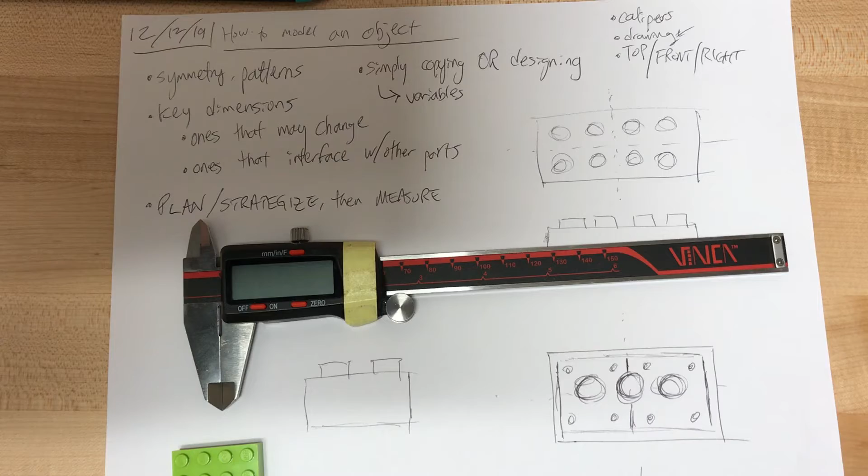In the first episode, we planned it out. In the second episode, we're just going to walk you through calipers. There's a 3-part set of episodes on calipers, so take a look at that. I'm only going to do a brief review. Of course, you should always return your calipers, turn them off, back to where you found them.

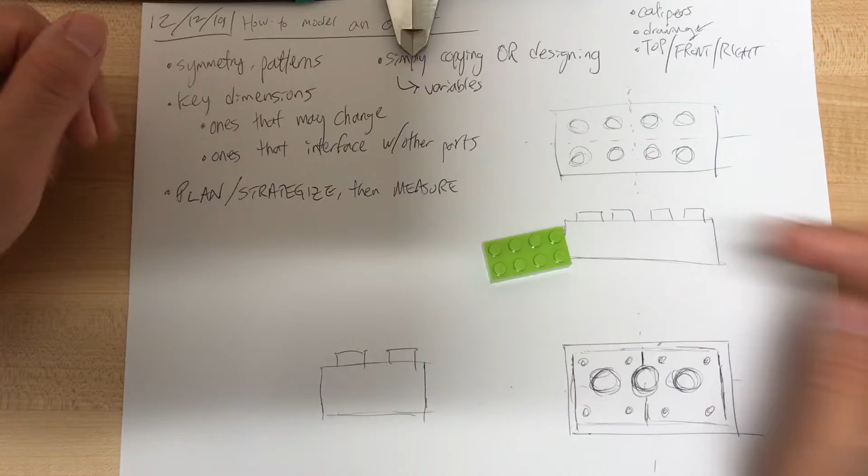All right, so we did these sketches, and this is going to help us with marking our dimensions. The Lego brick is really nice because it's pretty straightforward, but also has some interesting features. Real quick, in terms of a style guide, the circle and slash means diameter. Often, let's say you have a rectangle, we have these parallel lines, a little offset from the edge, and then, I kind of painted myself into a corner.

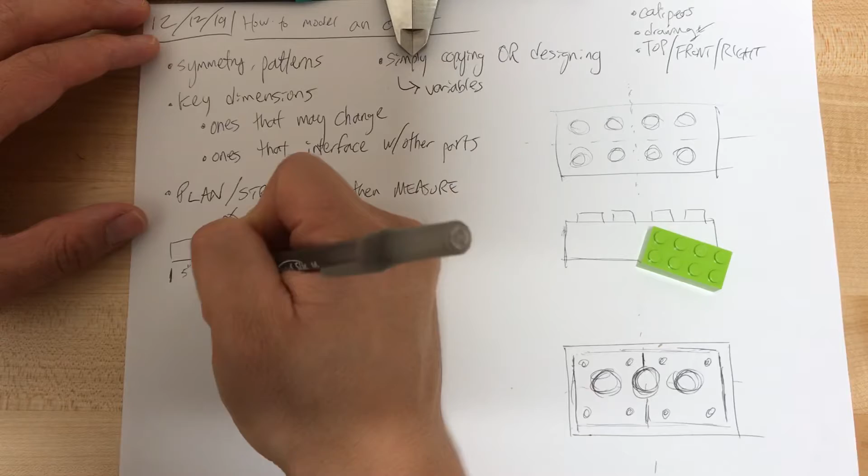Let's say this was 5 inches. So you sort of do an arrow. There's a whole official formal set of rules to follow, and these rules were very important. I guess they're still important, but they were especially important when CAD was stuck to a desktop computer, and when you went out into the shop and made things, you had to rely on drawings.

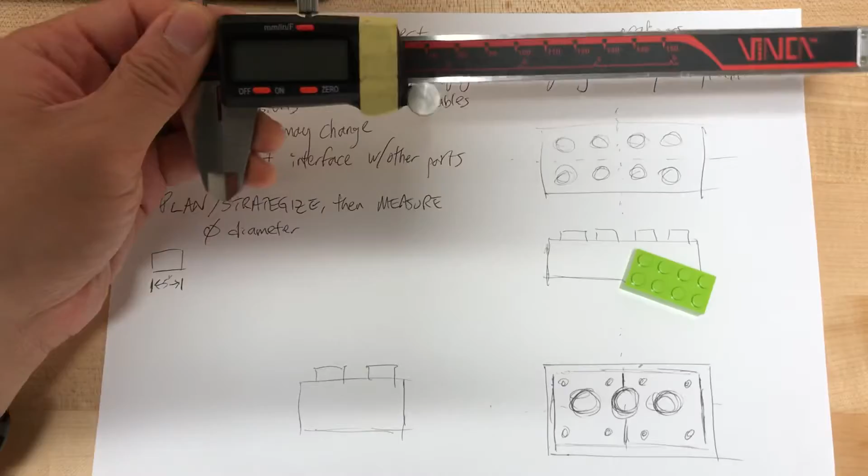Nowadays, you have CAD software that you can pull up on your tablet, and it's just a lot more accessible. All right, so we've got our calipers, we'll turn them on. Now, often in engineering we are working in inches, and I personally like to use inches. But actually, I know for Lego, millimeters is a little better. So you can modify, adjust as you need.

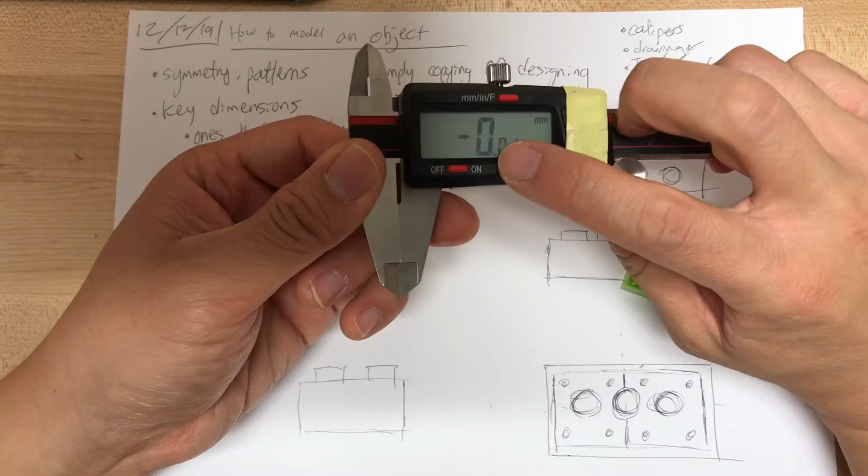All right, as we know with calipers, make sure that your 0 is true 0. Open it up with a thumb wheel. This will tighten it up. Cannot move. Loosen it just a little. Okay, and then it closes. Remember, we have 4 ways to measure on the caliper, so let's open up to a certain value.

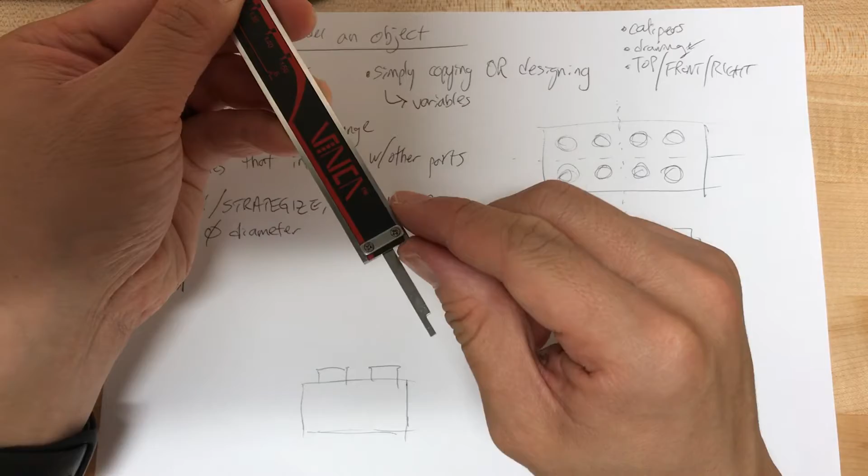29.35 millimeters, I'm going to lock it. Again, this is just review. 4 places, what is it? It's measuring between here and here, here and here. So we have outside, which is here and here, inside, here and here. Depth, okay, I'm not going to adjust the camera, between here and here. And then step, between here and here.

So let's just do a quick one. We're not going to look at numbers, but just show you how you would use it with the Lego brick. So you have something like this, outer. All right, you kind of take a few measurements, take the average of it in your mind. Okay, you can measure that.

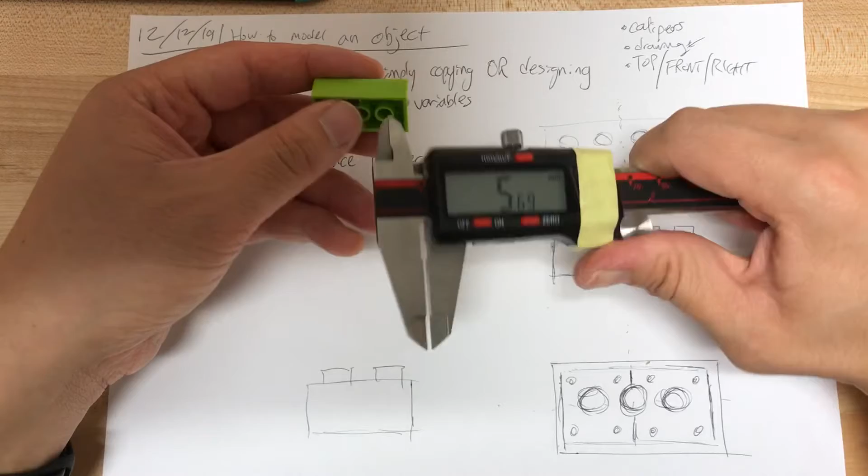So inner would be something like, let's say the circle. Actually, that's probably the best one here. See that? Or you could try to measure between those two.

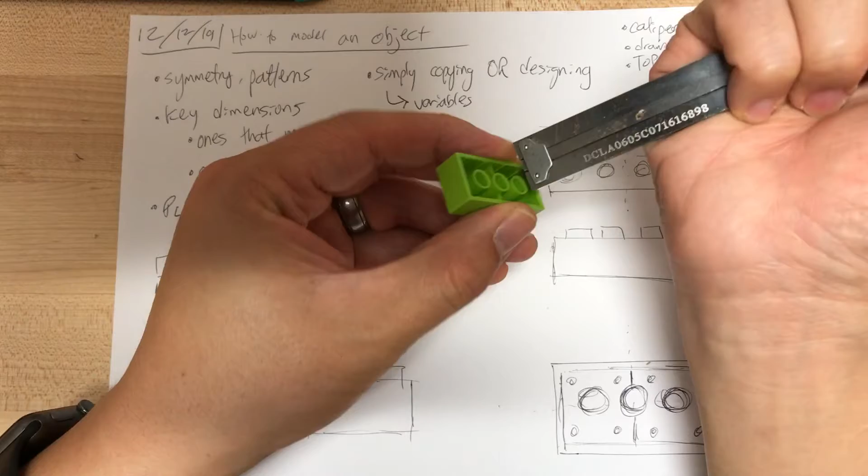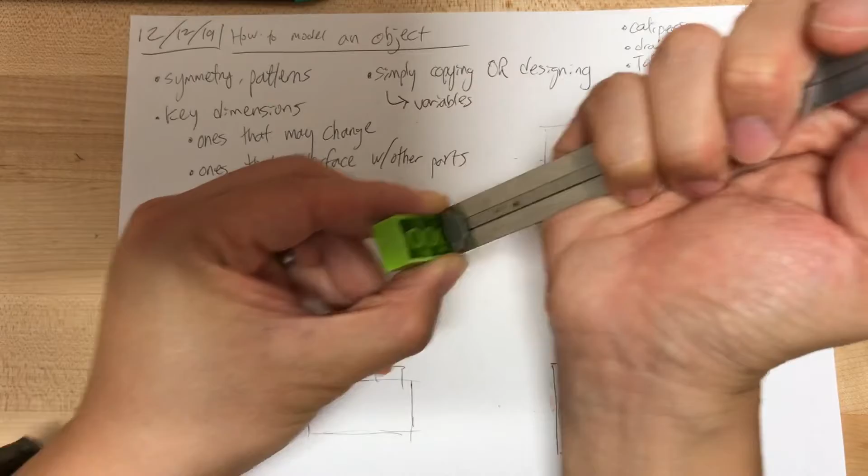Then the depth is really good when it's a sort of hole and you're trying to measure the depth. So you see right here, where my left index finger is, that's one surface. And if we place it on the surface, I can use my thumb here, right thumb, put it down until it stops. And then I can get a reading.

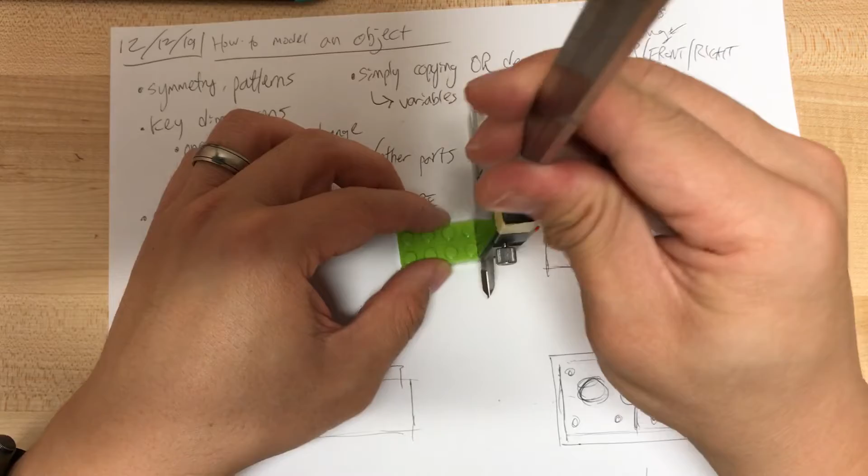And the step, this is the hardest one to see. Think of step just as sort of a height measurement, but it's not a hole, so you have a lot more to measure with. See, so like that. So let me show you again. Boom. Okay, you could also measure it like that. That's fine too.

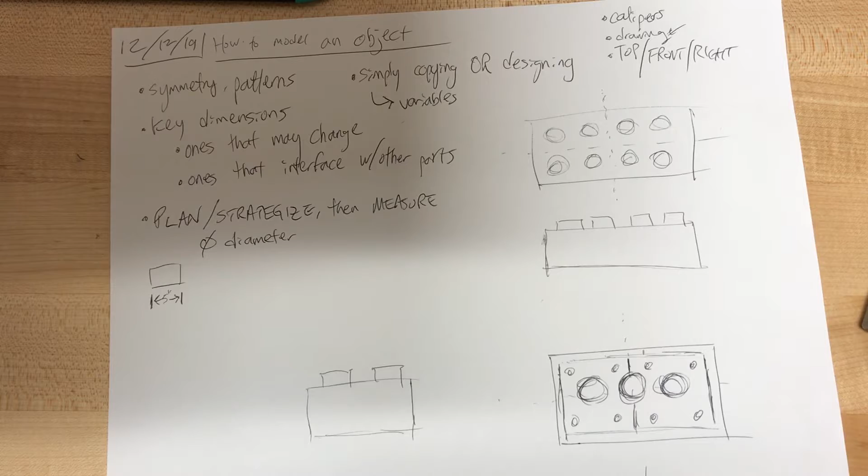All right, I'm not going to go through all of the dimensions. I'm just going to walk through some main ones. And then when we get to a 3rd episode, which in this case we'll do in OnShape, I will have already made the measurements, but it's still good practice for you to do so. Feel free to pause here right now, spend some time on your own. You know our strategy here: make the measurements, and then come back to see how I go about doing it.

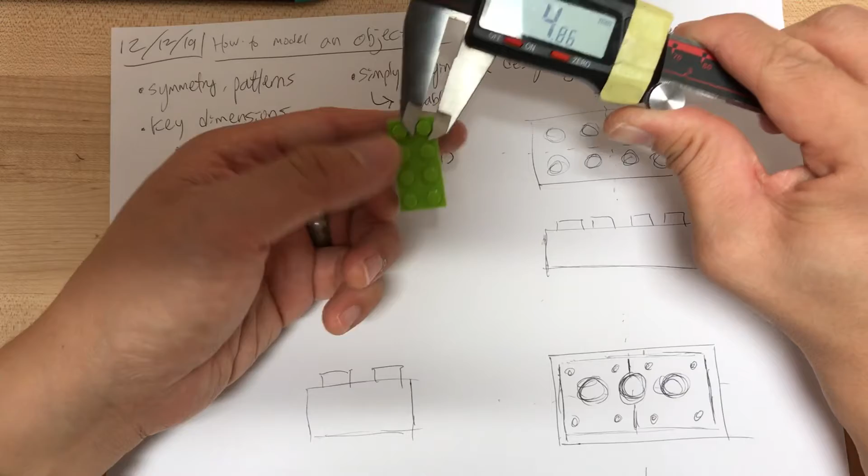All right, so I know these 8 circles are all the same diameter. 4.86, you make a few measurements, 4.87, okay? You just make your best guess. And again, you think back to critical dimensions - just make sure if there is a critical dimension that interfaces with something else, then you get that right. I don't know, I'm calling it 4.88.

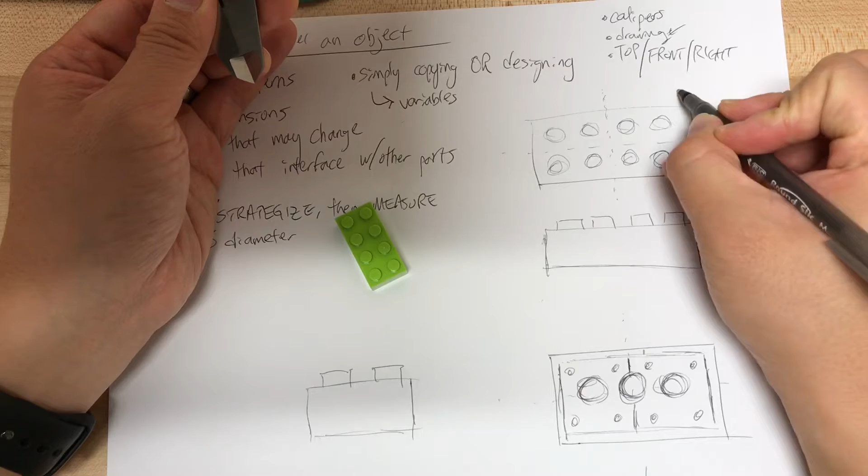Why not? So I'll do a little curved call out, I like to do this. That's probably not proper style. And I did 4.88 millimeters. Again, I would like to emphasize my own personal preference with inches, and often in engineering we do inches. But in this case, because I know Lego, it's better to do millimeters. All right, what else can we look at?

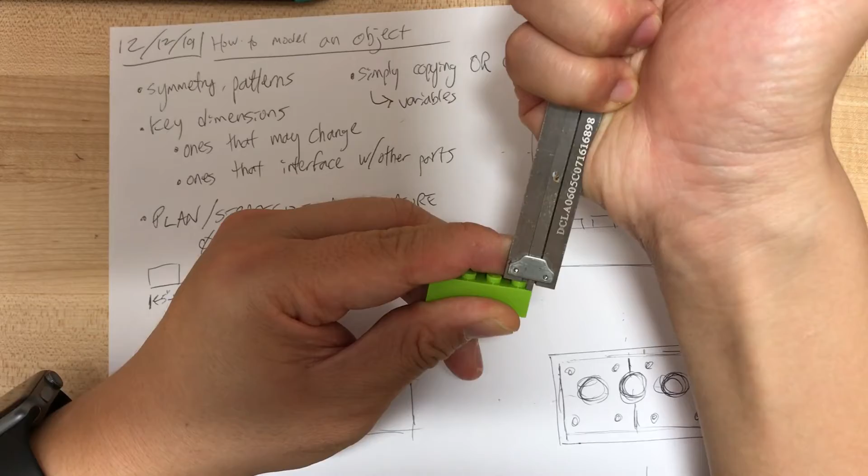Let's look at the height of the stud. So, see if I can put this into picture here. Okay, 2.07. So you see here, here to here. Sometimes if it's narrow, then you can do this. 2.07 millimeters. Now, let's do bigger dimensions.

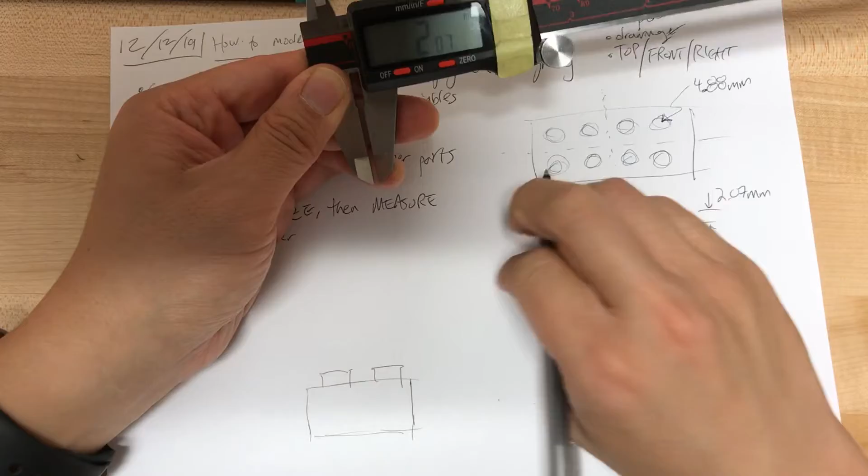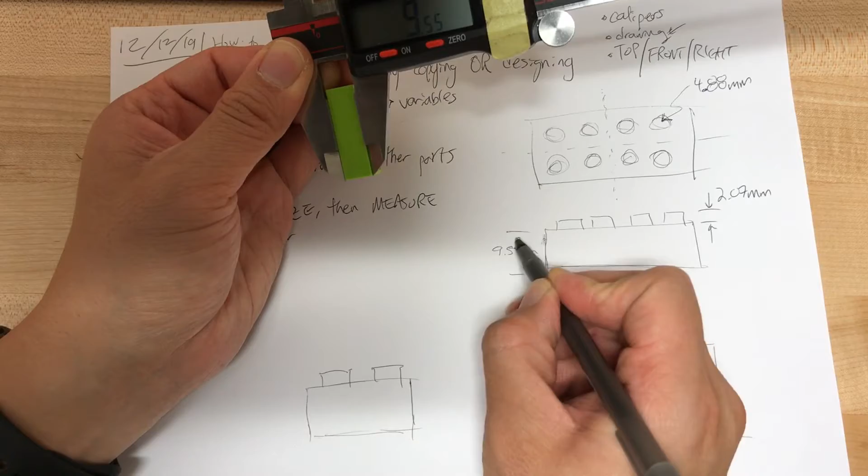Let's do this. I guess we could have done this minus this. That would have been fine. Yeah, lots of different ways to do it. So I'm going to do this, 9.54. So let's draw here, 9.54 millimeters. And of course we have the other dimension of the box on this side.

15.75, let's call it that. Again, these are not all quite to scale, but hopefully the distinguishing features of our object will help us differentiate.

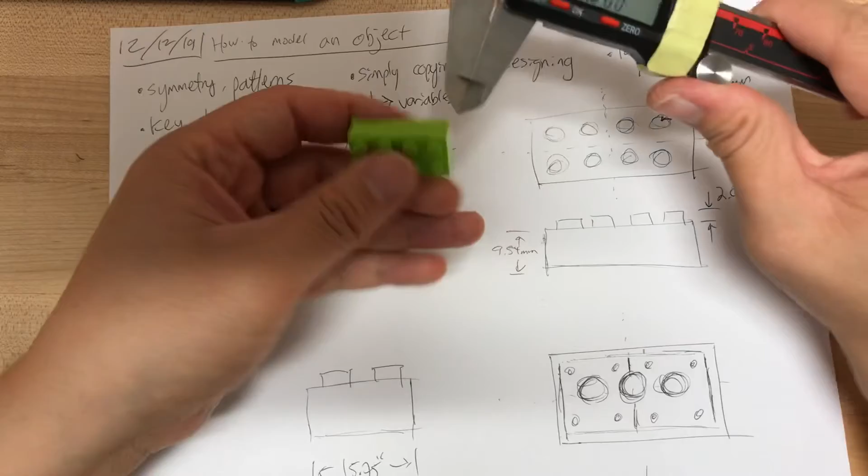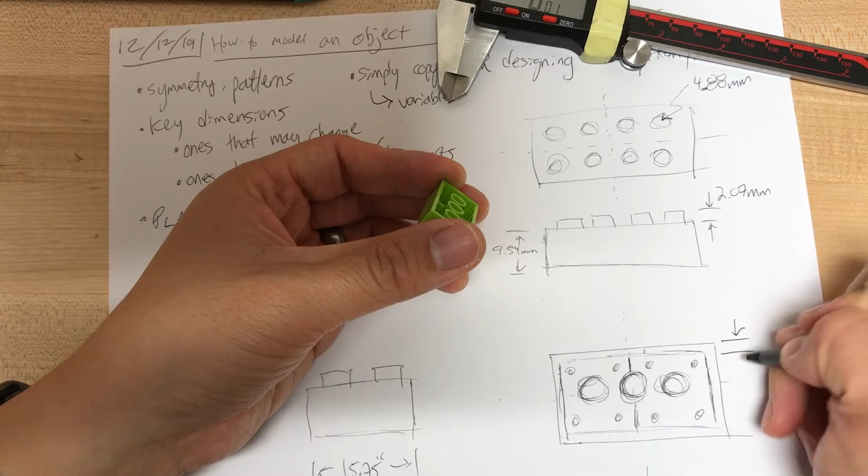Jumping around here, let's go to the thickness. Thickness right here, 1.18. So here to here, draw our arrows. 1.18.

Let's see, inner of this hole, kind of spin it around, call it 5.04. And I'm going to say inner diameter 5.04.

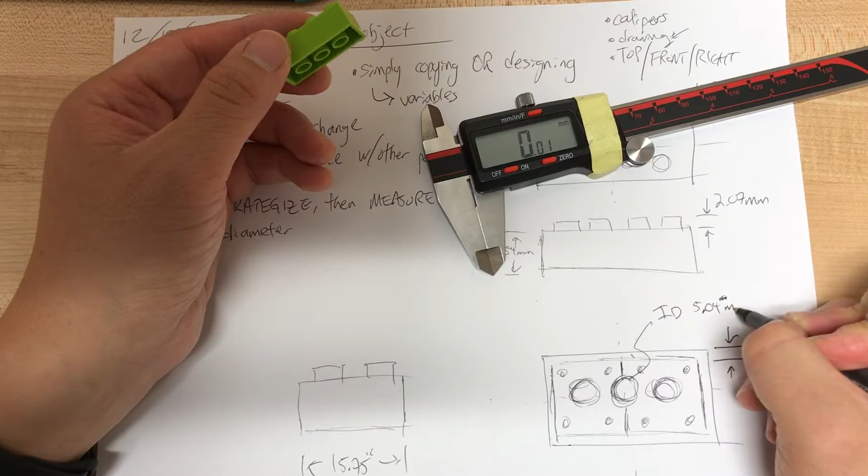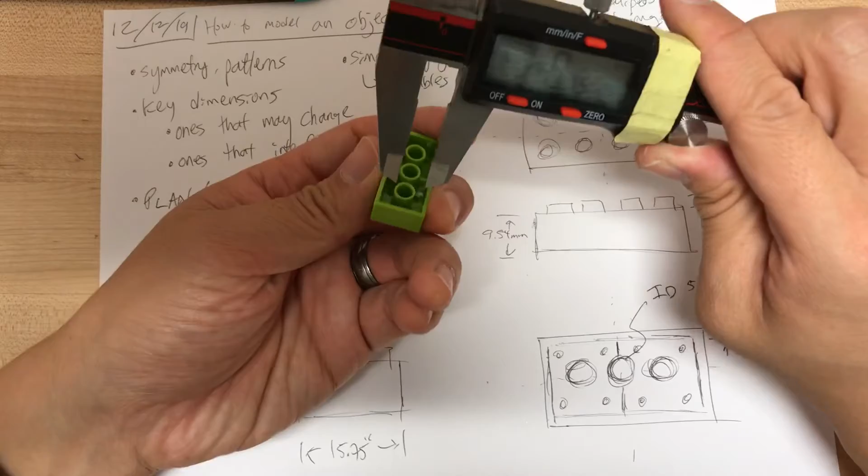Oops, not inches, millimeters. And the outer, a little harder to measure. We're going to assume all three of these are the same. Looking at 6.44 maybe. Yeah, sure, let's call it 6.44. OD, not Garfield's dog, but OD.

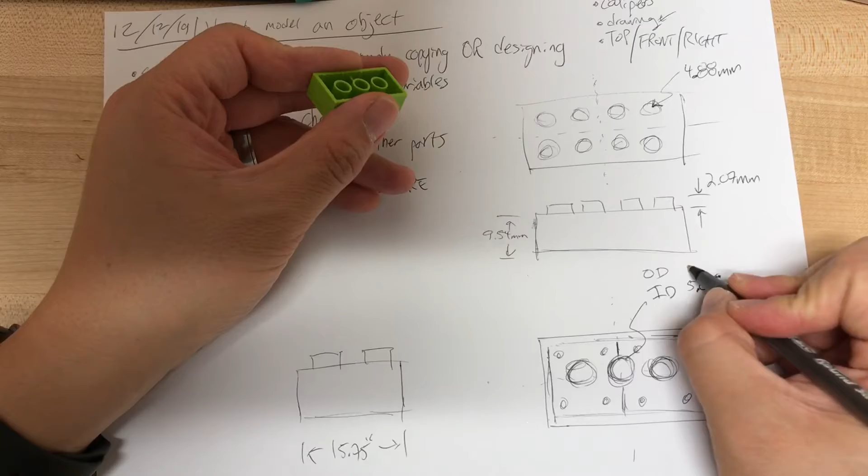6.47. Now you see here as I'm planning it out, if you have to write and then draw, you sort of, I don't know, I feel like that loses your momentum. So that's why draw it out, plan it out, and then hunt for the information.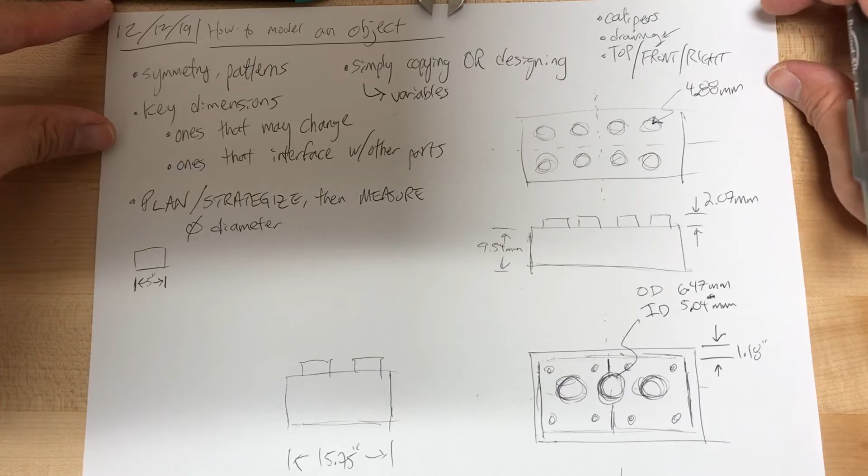Those 4 circles, okay, you can imagine trying to eyeball it. I'm just gonna skip that for now. 0.83. So, ooh, that's gonna be tight. 0.83. I don't know how proper it is, but usually there's not a 0, I just call it 0.83.

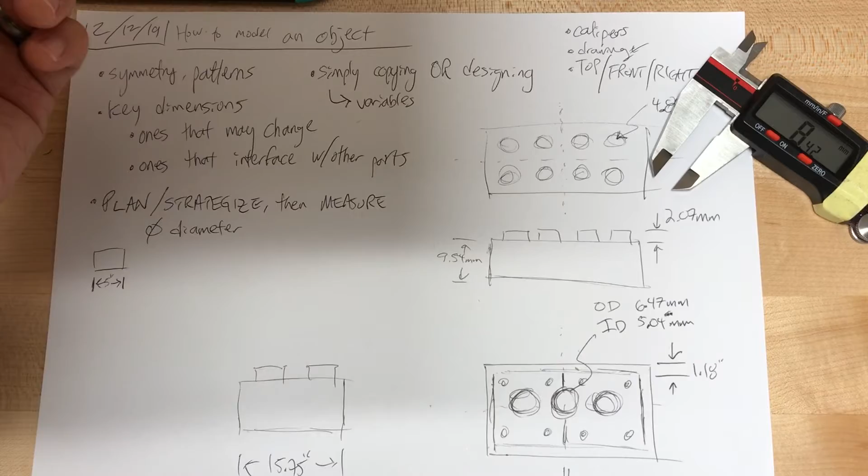What else? Okay. So, can you guess the major thing we haven't talked about? We've talked about the diameters of the circles, the cylindrical shells, outer diameter, inner diameter. We can assume this is centered, okay? So whatever the center is, that's where it is. But now we have to figure out the distance between.

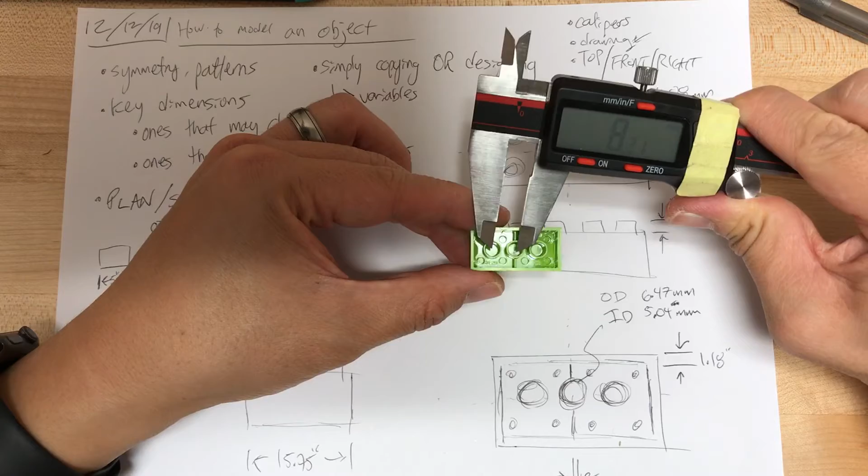Now, this is a very important part where in real life, it's actually hard to measure the distances between 2 centers. Yeah, you see that? It's kind of hard. So what you end up having to do, you can do a number of things.

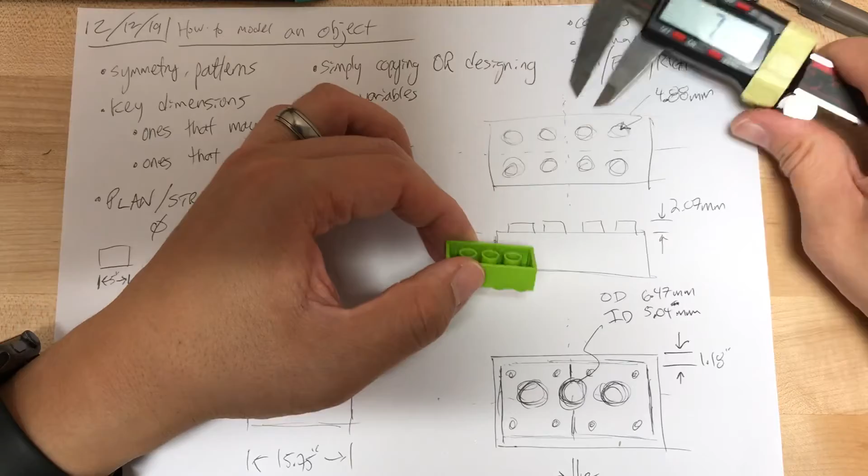I'm going to do this: 3.10. And I have to be very careful here. Okay, this is where that big drawing would help.

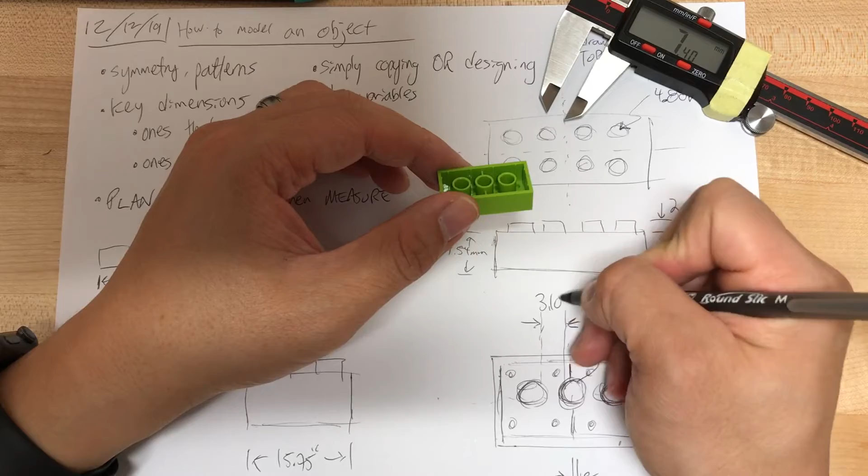Okay, so if that's this, I wonder what happens if I do this, 13. I have to be very clear where I measured this. So you can see it's already kind of getting really messy.

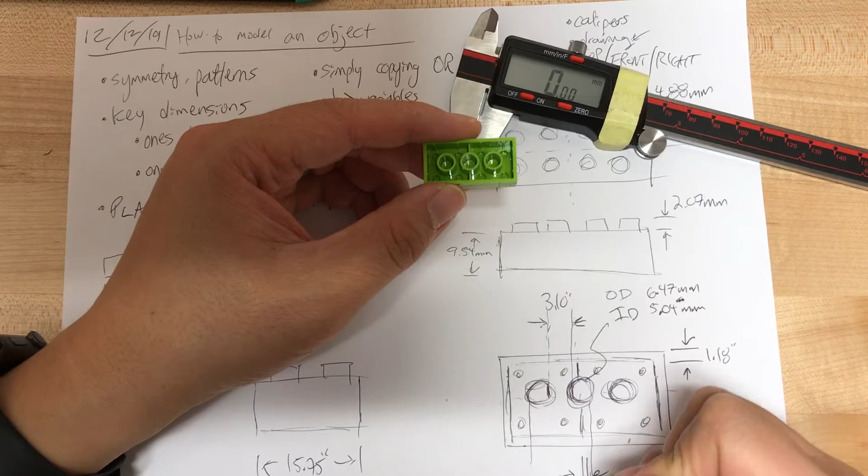13. All right, this one's trickier because you've got sort of a shell. In this case up here, what's our assumption going to be? Our assumption is going to be that the spacing is the same, okay? And we assume there's symmetry from this side to this side, this side to this side.

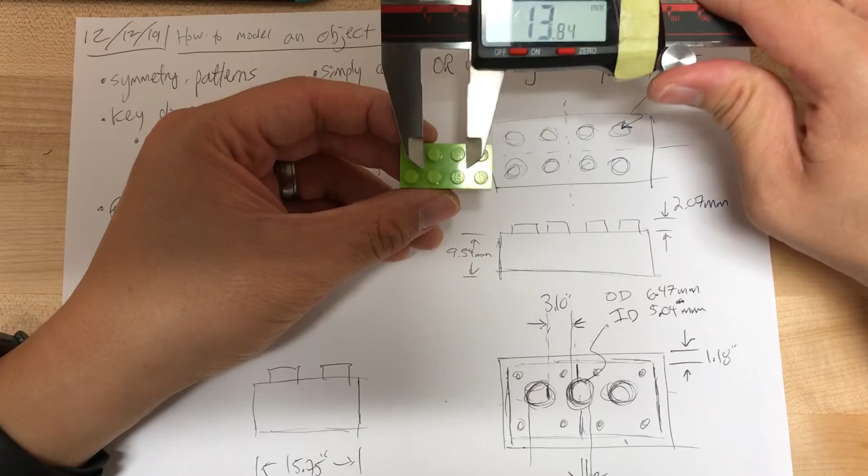So what we're going to say is we are going to measure, how are we going to do this? We can do this many ways. I'm going to do similar to what I did down there. Is it the same? 13? I don't know. Will 0.14 millimeters make a difference? Let's just measure it. Okay, 12.86.

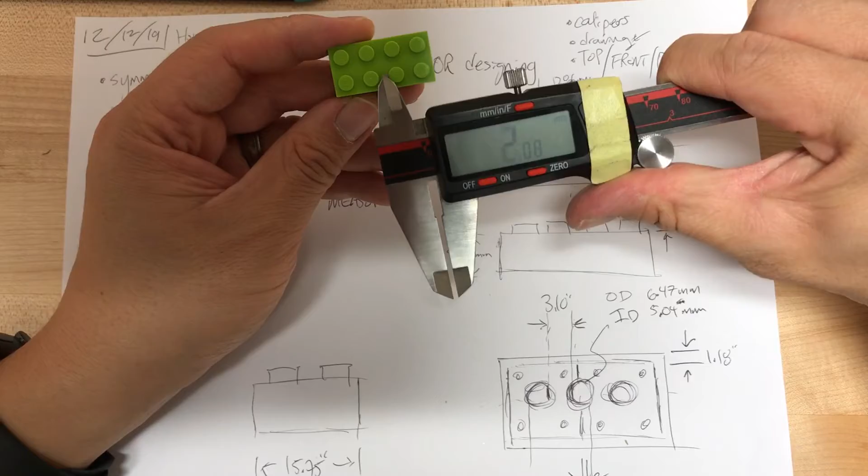So in this case, you don't have to distinguish the outer versus inner. That's 12.86. And then the inner here, right? And that makes sense that that would be a standard gap because this is just a brick by itself, but Lego is, you can sort of put in all different sorts of combinations.

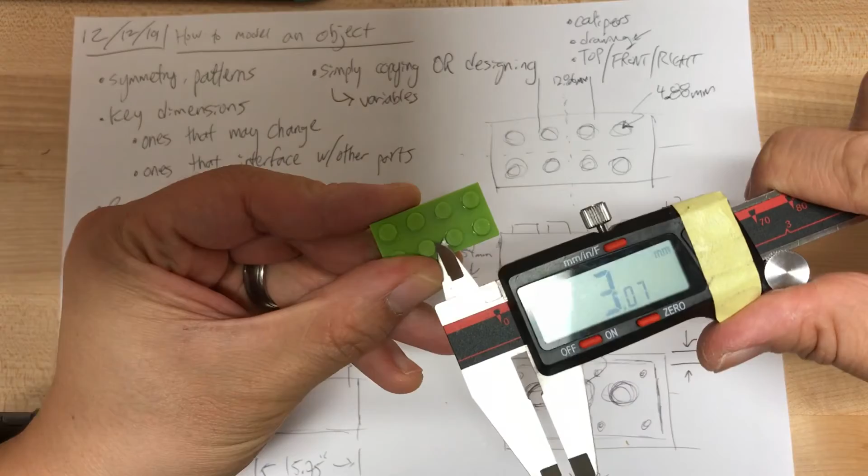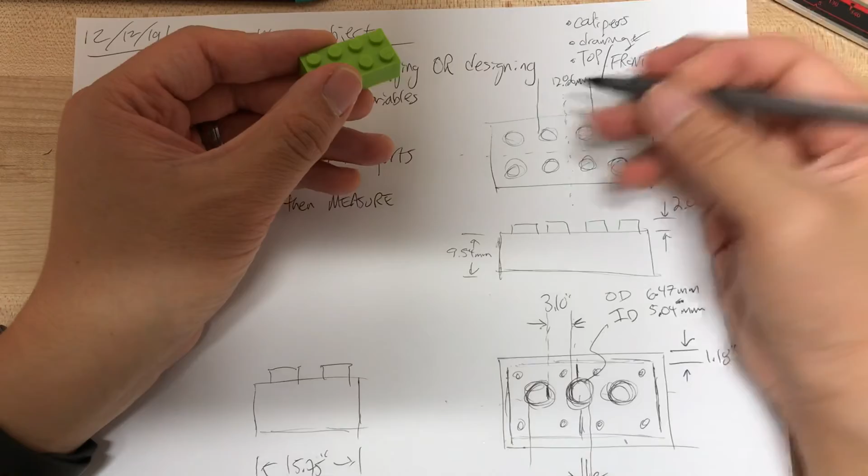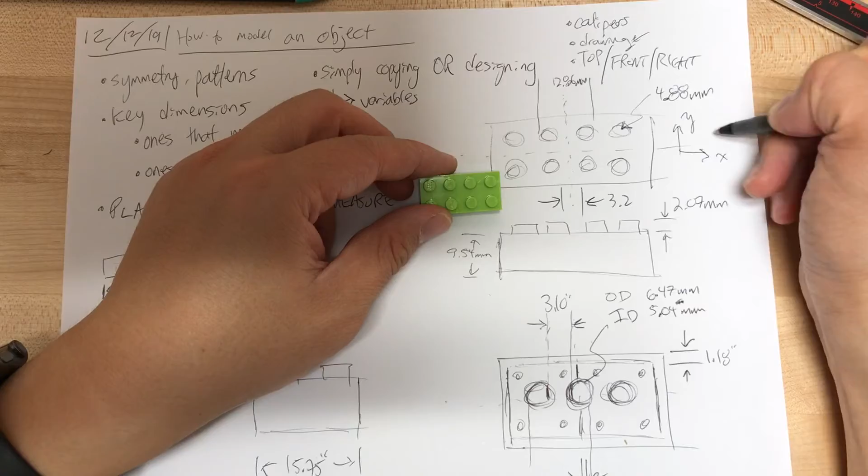And there are official measurements online. That should be my last point as we finish off this episode. I don't know, 3.2. And I'm going to assume that sort of the X and Y direction, it's equal. And we know that just because the way that we put Legos together.

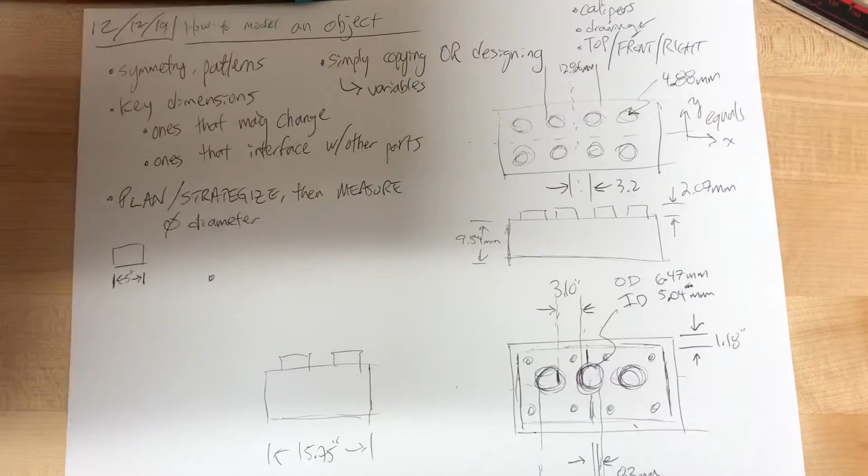All right, the last point that I want to drive home here, and I think I just lost that thought, is what? Let's see. So we talked about the outer and then the inner. And we said that we're making certain measurements, but we don't have to measure it each time. We assume a certain sort of pattern. So once we set that value, yes.

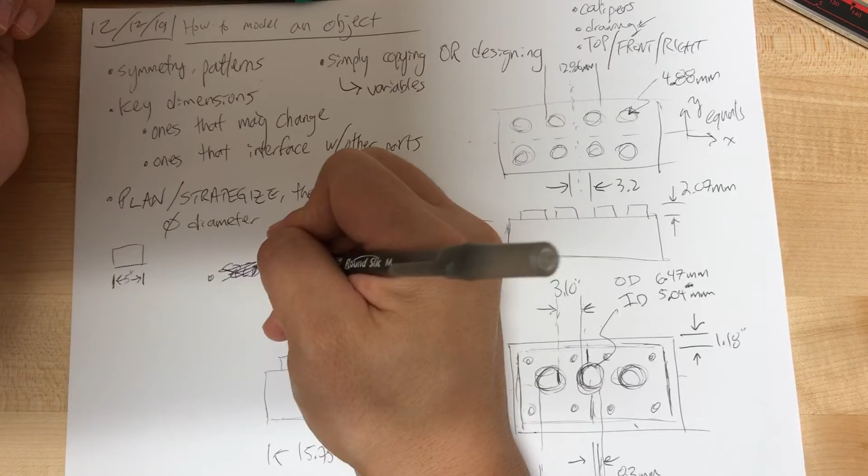Let's see, what shall we say? Specs. Specs, still can't spell. Specs from vendor versus measured. All right, dimensions.

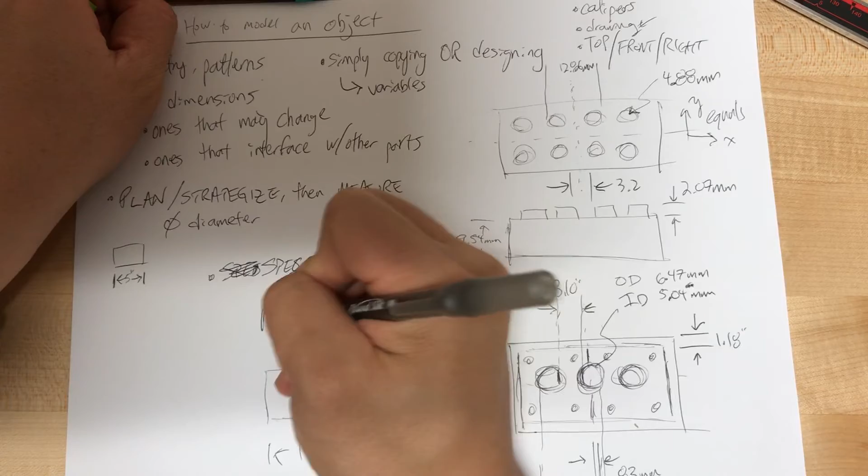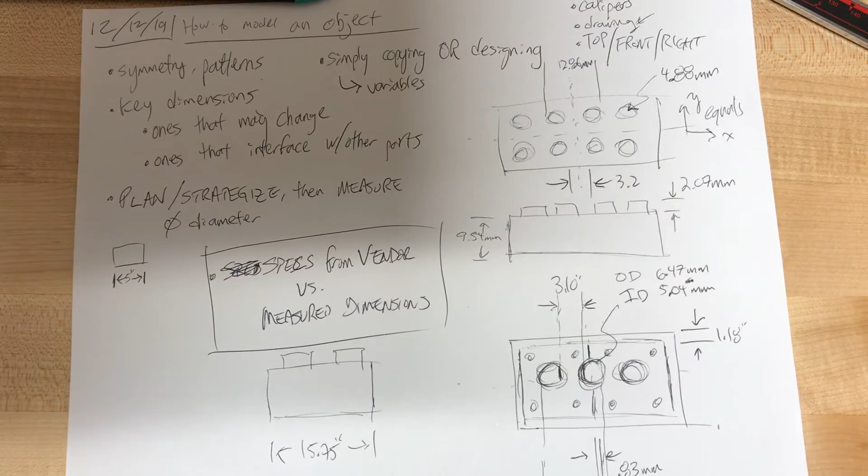So we're reaching the end of this video. What do I mean by this? It's a balance. Sometimes you can just pull off a value from the vendor's website and see, oh, what is this spacing supposed to be? And that can be a help. That can be a good start, especially if you don't have the product yet.

However, depending on what are the critical key dimensions that interface with other parts, you might want to actually measure. And that's because the tolerances are all going to be different in how the part is made. So something might be 3.5 inches, but they're going to say that based on manufacturing, it's going to be plus or minus, I don't know, 0.0001 inches or 0.005 inches.

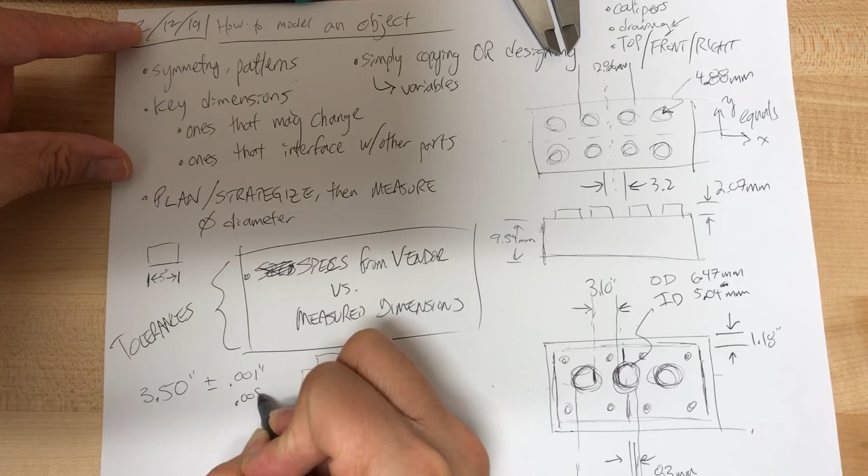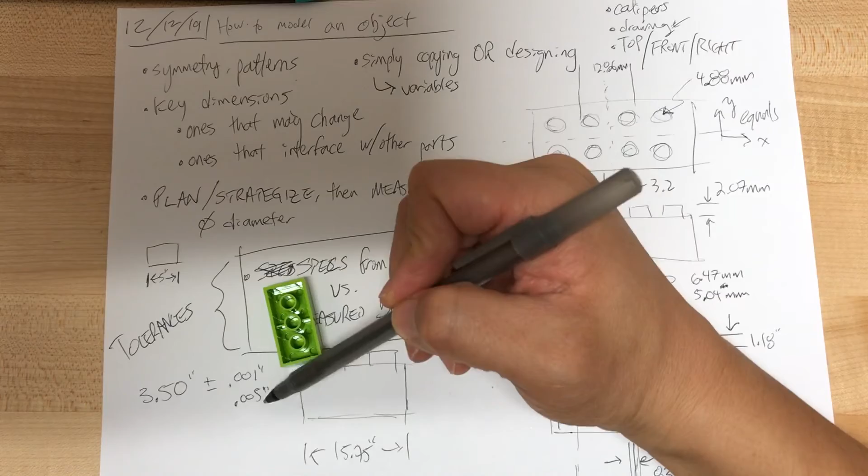So in other words, and this is where manufacturing comes into play, when they make all these, let's say, Lego parts, they'll make them, but they'll have a quality control system to say anything that's 3.505 or greater, toss it. 3.495 or less, toss it. But if it's within spec, then that's good.

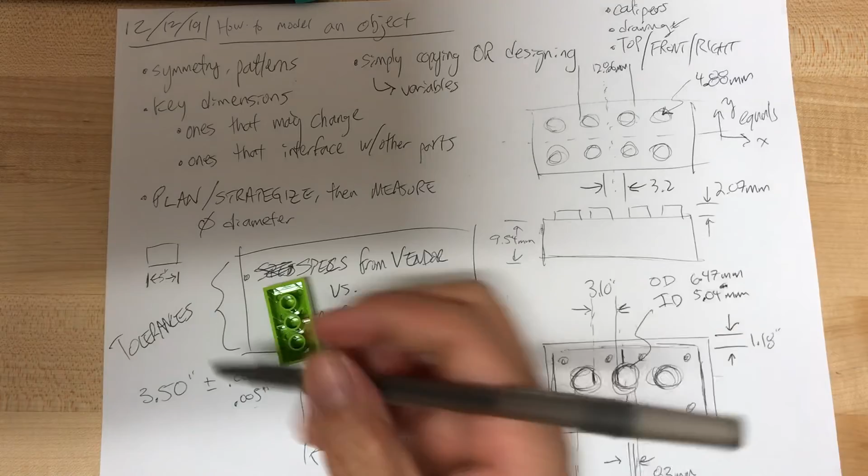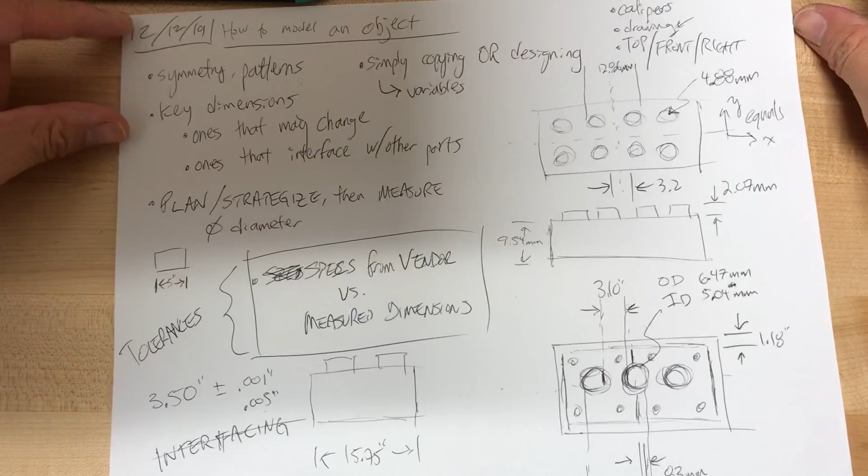And so what ends up happening is you have to figure out, especially if you're not talking about Lego to Lego, but different parts to other parts, whatever that interface, whatever the interfacing dimensions are, you have to prepare. And of course, with engineering, you won't know until you actually do it, but you can start with at least some initial information.